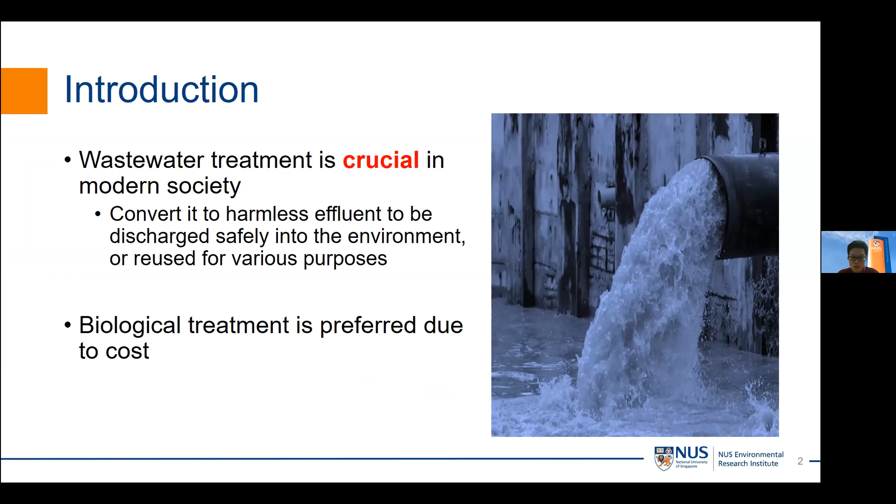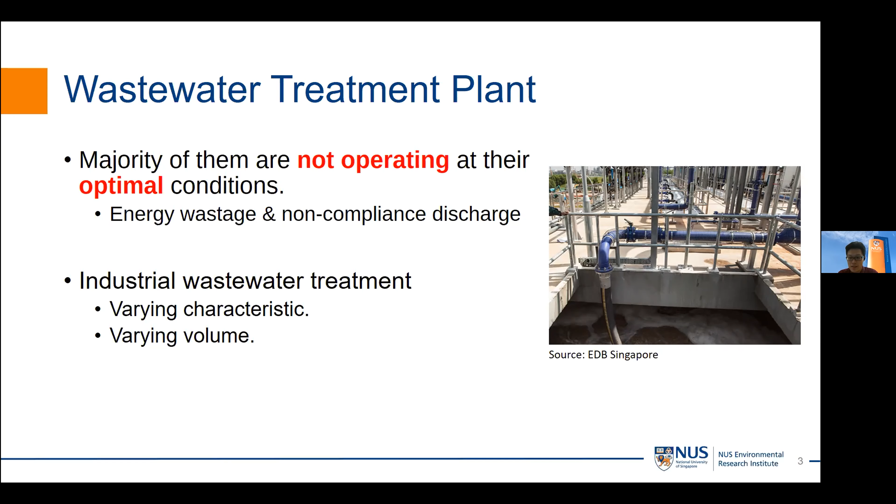In wastewater treatment, biological treatment is often preferred due to its low cost. However, the majority of wastewater biological treatment plants around the world are not operating at their optimal condition, resulting in huge energy wastage and even non-compliance discharge. This is even more pronounced in industrial wastewater treatment, where different processes produce wastewater of varying characteristics. In addition, uncertainties in operating hours often result in varying volume as well.

In wastewater treatment, aeration is one of the biggest energy consumers in the plant. In aerobic treatment, air is supplied to allow the bacteria to break down the contaminants. The aeration process, however, consumes up to 50% of the total plant energy consumption, with up to 30% of the plant's total energy wasted due to poor control. This means that the plant actually supplies more air than is actually required.

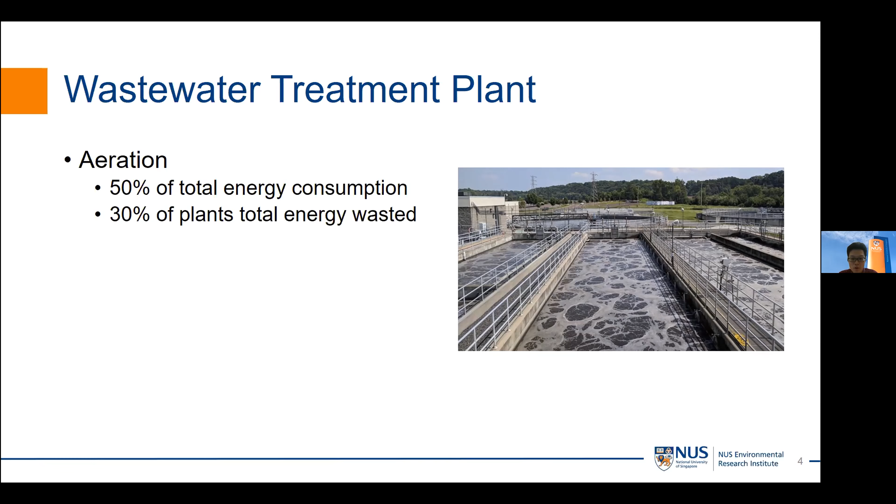Non-compliance discharge is another issue faced by wastewater treatment plants. With increasing environmental awareness, discharge limits around the world are getting more stringent. Non-compliance discharge will result in massive fines and pose risk to public health and the environment. Since 2014, 119 companies have been charged for illegal discharge in Singapore. In fact, we can use modeling to address this issue.

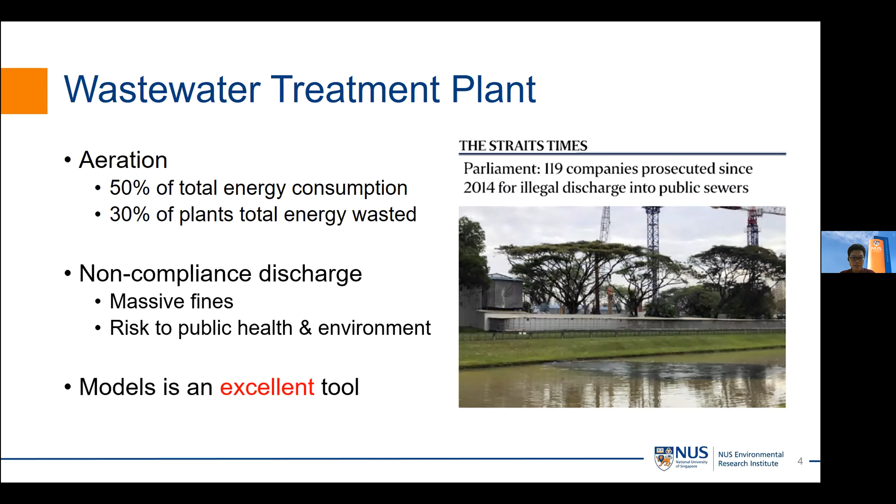In wastewater treatment, modeling is often used to design, optimize, and upgrade existing wastewater treatment plants. It also allows the operator to understand the effects of various parameters on treatment performance, allowing them to predict effluent quality and monitor plant performance. There are two types of models widely used in wastewater treatment systems, namely the mechanistic model and the statistical, or machine learning, model.

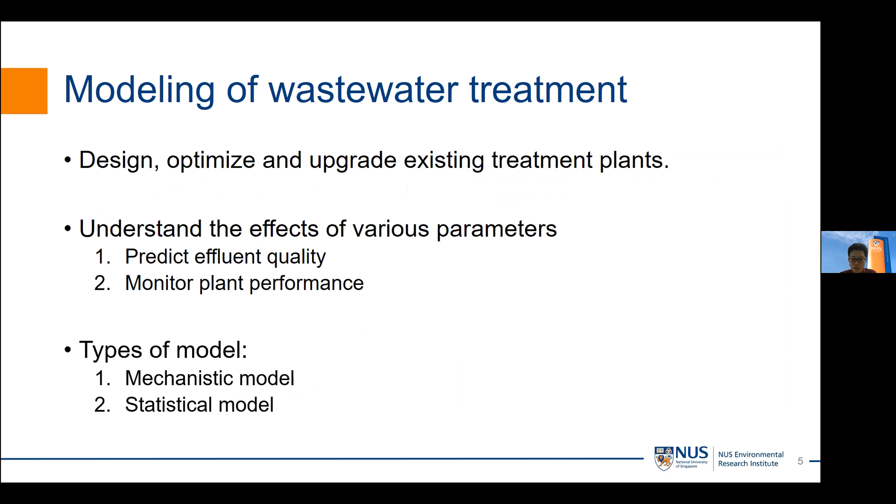Let me go through the mechanistic model first. Mechanistic models are based on fundamental concepts and equations. The physical and biochemical principles constitute the equation. But because of that, calibration is often required as most plants differ from one another. However, in most scenarios, average values are often used, which results in inaccuracy in simulation results.

Examples of wastewater treatment mechanistic models are the anaerobic digestion model as well as the aerobic digestion model, and the activated sludge model.

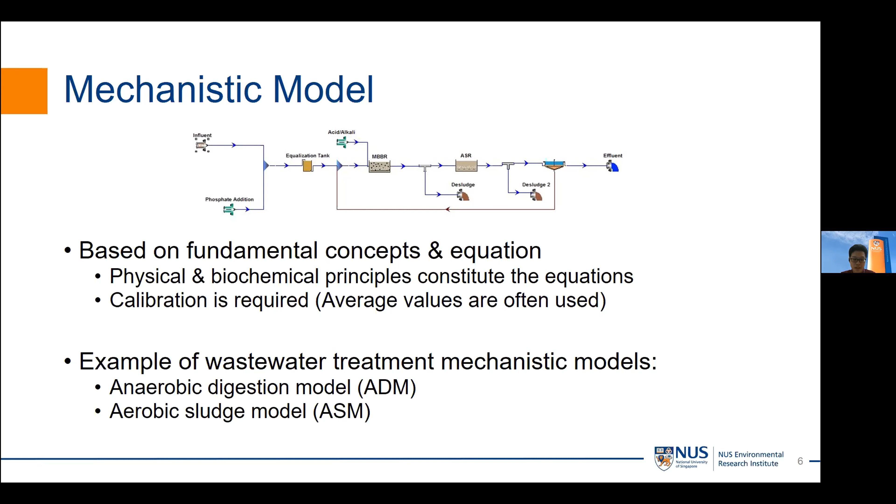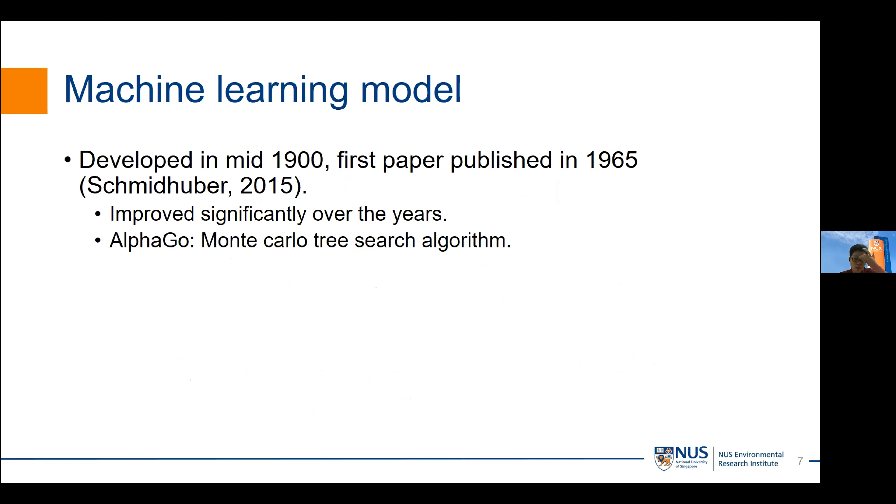Machine learning model is another well-known model. Developed in the mid-1900s, machine learning models have improved significantly over the years through data mining and collection. Most notably, AlphaGo, which uses the Monte Carlo tree search algorithm, is known to be able to defeat the best human Go player. There are numerous studies on the application of machine learning models in wastewater treatment performance, achieving very high accuracy of 0.95. However, its application is highly dependent on the quantity and quality of data.

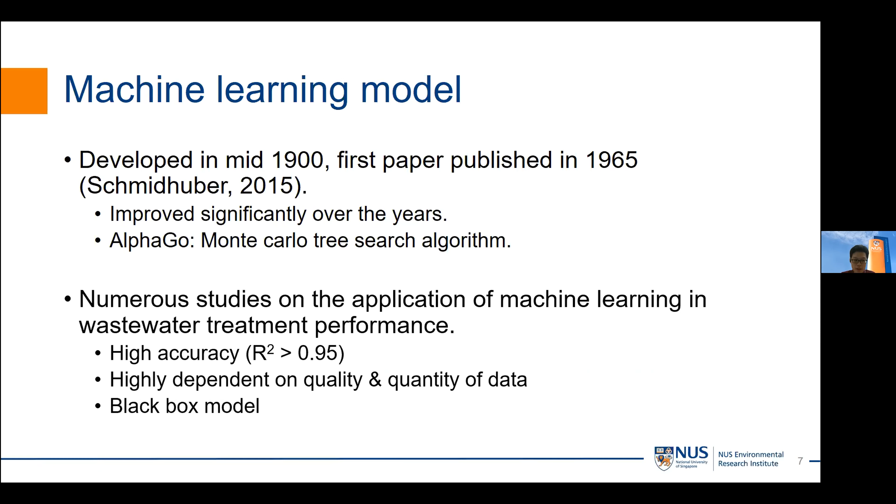And it is also a black box model, so one will not be able to know how the equations correlate with each other.

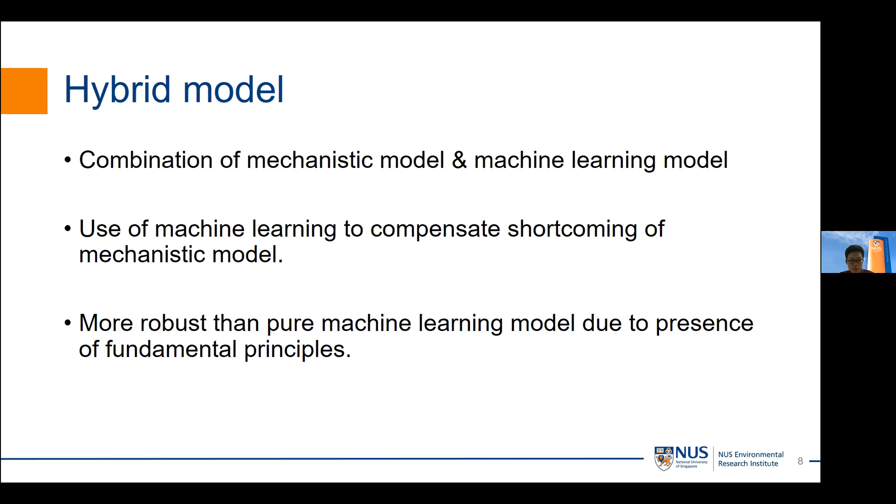This brings us to the hybrid model. Hybrid model is a combination of mechanistic and machine learning model. We can use machine learning model to compensate the shortcoming of mechanistic model, while the hybrid model is also more robust than pure machine learning due to its presence of fundamental principle in the model.

So what do I mean by this? In these two examples, there's a parallel hybrid model and a serial hybrid model. In the parallel hybrid model, the mechanistic model will calculate the treatment performance, while the machine learning model will calibrate the difference between the measured and simulated data, compensating for the inaccuracy of the mechanistic model.

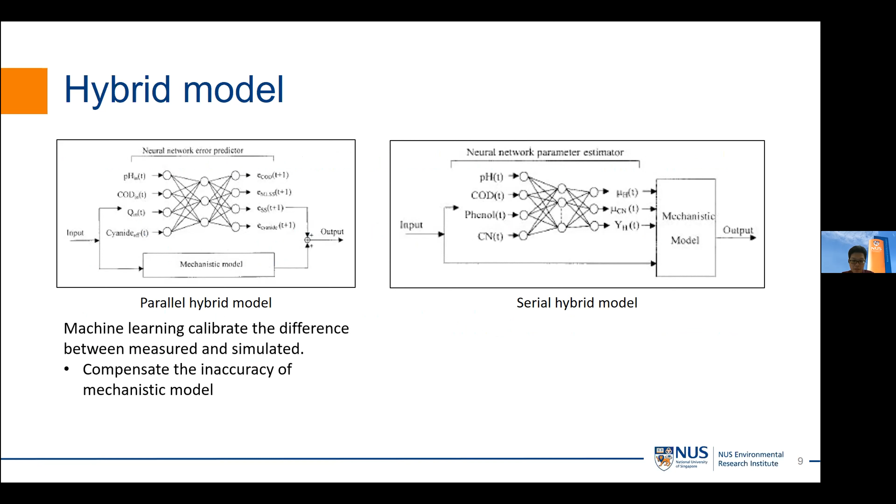In the serial hybrid model, the machine learning model will provide the unknown parameters to the mechanistic model. The mechanistic model then predicts the treatment performance. For example, in this scenario, the serial hybrid model, the machine learning model will predict parameters such as the mu, the maximum substrate uptake rate of cyanide, which will then be fed into the mechanistic model for a more accurate output.

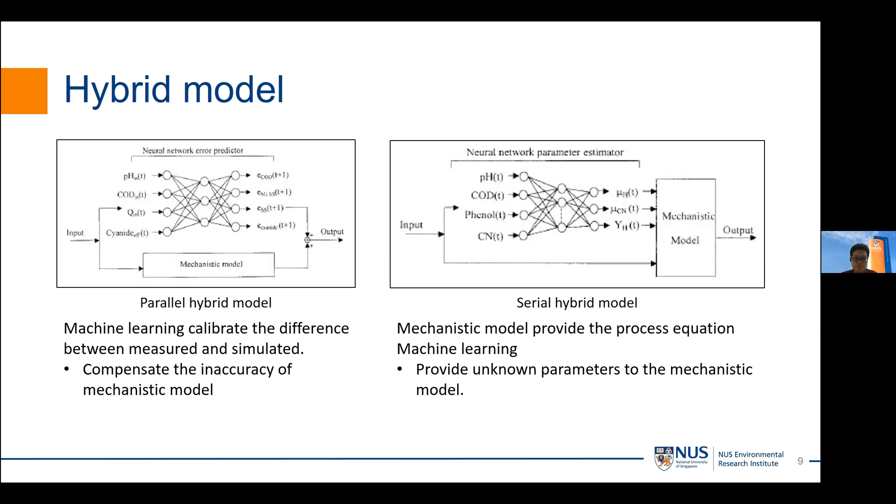In this presentation, we'll be showing our proprietary hybrid model, which is actually a combination of a parallel and serial hybrid model, which further improves the prediction. We have actually done some work using the hybrid model, and we will be showing the result later.

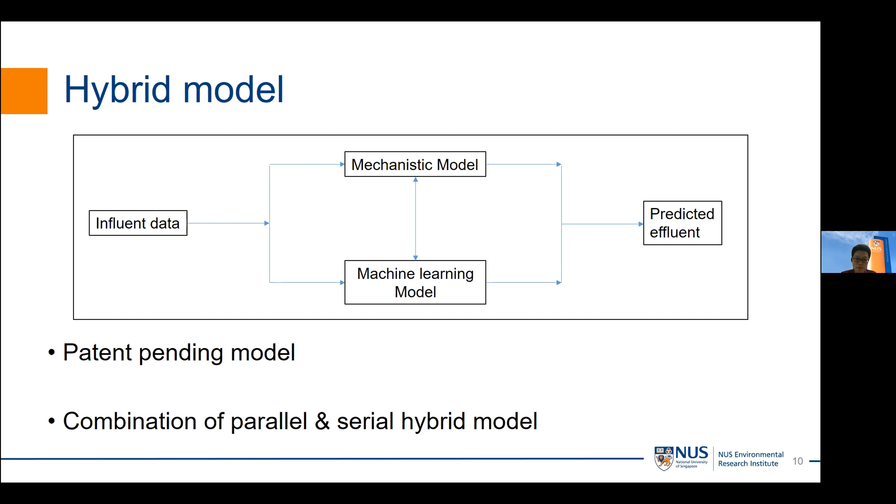As seen in the diagram, the influent data will be fed into both mechanistic and machine learning model. The mechanistic model will also receive information from the machine learning model, while the machine learning model will receive information from the mechanistic model. They will iterate within each other and then come out with the predicted effluent output.

So with more data, we can actually improve the simulation.

The hybrid model was able to outperform the mechanistic model, as the mechanistic model requires careful calibration. For example, in mechanistic model, one will require to fractionate the COD into different components, which takes about a day or two to do it. But every batch of wastewater is different, and hence it is actually not practical, as the wastewater would have actually been treated and discharged before the experimental results are out.

Hence, average values are often used as mentioned previously. The hybrid model, however, does not require such careful calibration, and it is also still able to come out with good result.

We have implemented the model in industrial wastewater treatment system as well. In this experiment, an MBR was set up to treat pharmaceutical wastewater. From the figure, similarly, we can see that the hybrid model outperformed the mechanistic model, reducing the root mean square error and the percentage error.

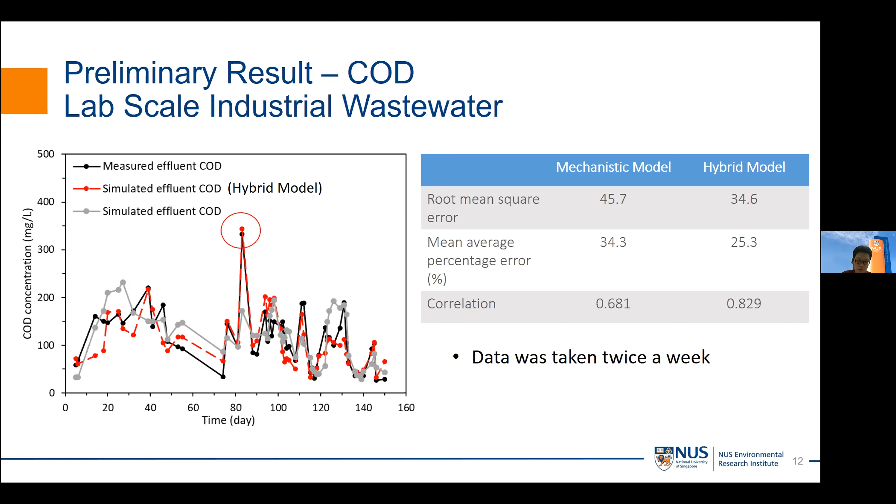While both results are both lab scale, we have also expanded our work into full-scale treatment plant. In this short 2 weeks work, we use our model to simulate the full-scale municipal treatment plant. We are able to achieve very good result with absolute error of less than 5 ppm and percentage error of less than 15%. The correlation was actually more than 0.95, which is actually higher than that of pure machine learning.

However, one may argue that domestic wastewater treatment in full scale is actually very stable and hence much more stable than industrial wastewater, and hence the simulation is much better than the lab scale.

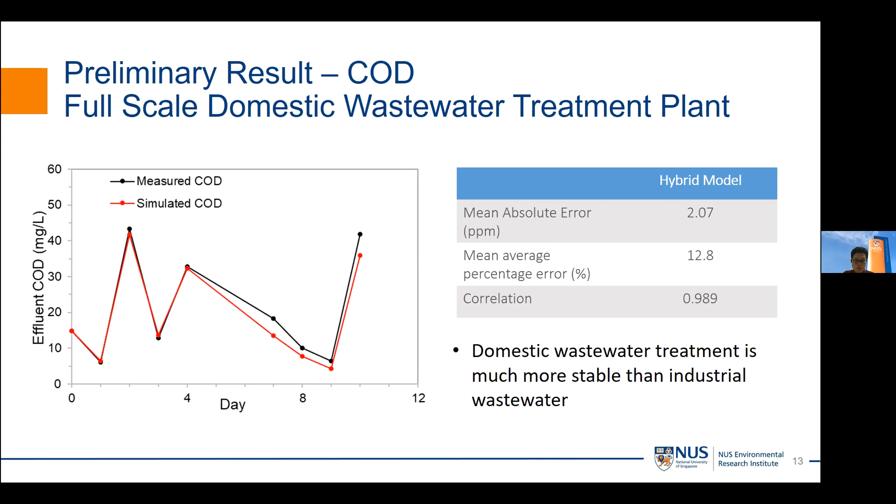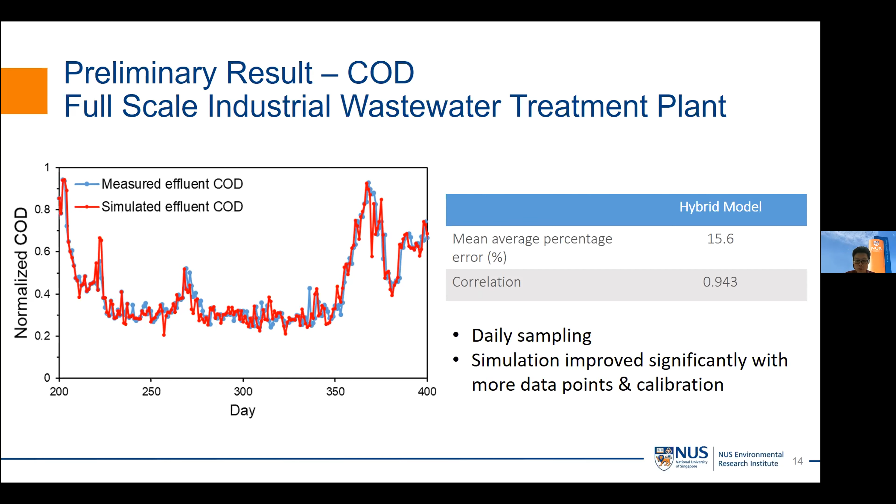The results from the full-scale reactor are actually better than the lab scale study, primarily due to the fact that the plant does daily sampling, which provided us with much more data samples, and we were able to train and calibrate our model better. This shows that the simulation improves significantly with more data points and better calibration, showing the importance of daily sampling.

The model can also simulate solids concentration. In this diagram, one can see that the model is able to simulate the mixed liquor concentration of domestic wastewater treatment with great accuracy. The simulation followed the trend well, and the percentage error is less than 10%. However, as we do not know the plant operation and how they collect the sample, this might explain why some of the data deviates from the simulation. But nonetheless, we can see that the trend of both the measured and simulated is going towards the same direction. In addition, we do not have data on the plant

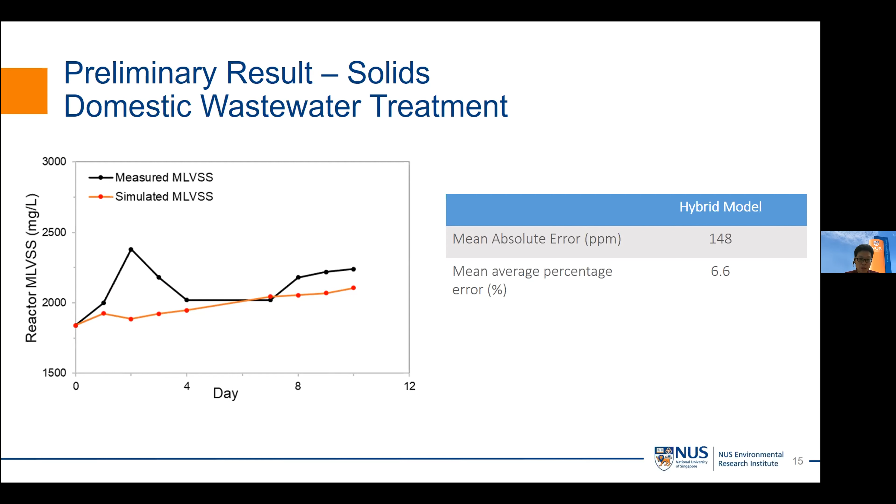biomass disposal. According to the operator, they dispose their biomass through MLSS measurement. So once they measure the MLSS, they will try to keep it within range. From this, we can use our model, as our model will be able to predict the biomass growth, and we'll be able to know if the biomass will be within range prior to the measurement.

We also use our model to predict solids concentration in industrial wastewater treatment. The result is not as good as the domestic counterpart, similarly due to the fact that we lack the biomass information and we do not have the discharge information, the solids retention time, etc. Nonetheless, it is still a good indication to allow the engineer to know how much biomass growth there will be per day, and the engineer can make informed decisions on how much biomass to be disposed daily.

This might not be an issue for tropical countries like Singapore, but for countries with 4 seasons, it is actually very important that the biomass within the system is kept within range. This is because when temperature drops, processes such as nitrification and bio-P removal will be affected greatly.

And hence, during winter time, they will try to retain as much biomass as possible. With our simulation, with our model, we'll be able to give them more information on how the biomass is able to affect the process, how much biomass to be retained within the system such that their processes such as nitrification and bio-P removal will not be affected adversely. So the solid concentration will be important to ensure that the processes will work as per norm and will be able to meet the discharge limit.

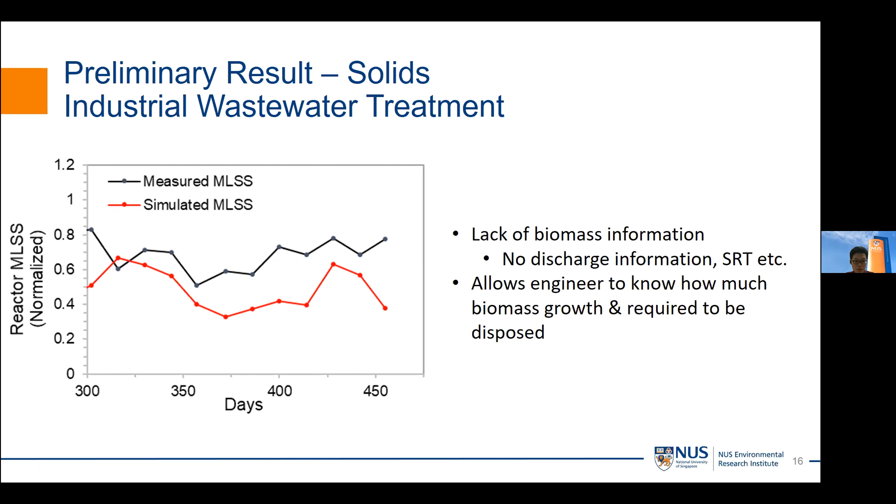Due to its accuracy, the hybrid model can also serve as fault detection. From the graph, you can see that the simulated value follows closely to the measured value all the way to day 103. On day 103, the measured value differed greatly from the simulated value. This means two things: either the equipment involved in the nitrification process is damaged, or the simulation is off. Our team began to check the system and found out that the pH control is actually damaged. Nitrification process requires careful pH control, and with the pH control damaged, it will cause the nitrification

process to be affected and hence the simulation to be off. From day 103 onwards, manual pH control was done, and the pH control was replaced on day 135. After that, the measured value is again very closely correlated to the simulated value. This proves that the model can actually be used as a fault detection as well.

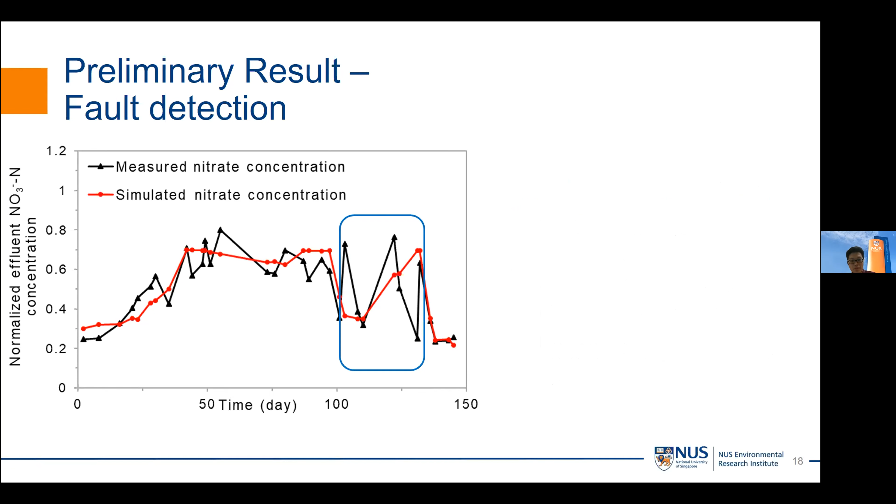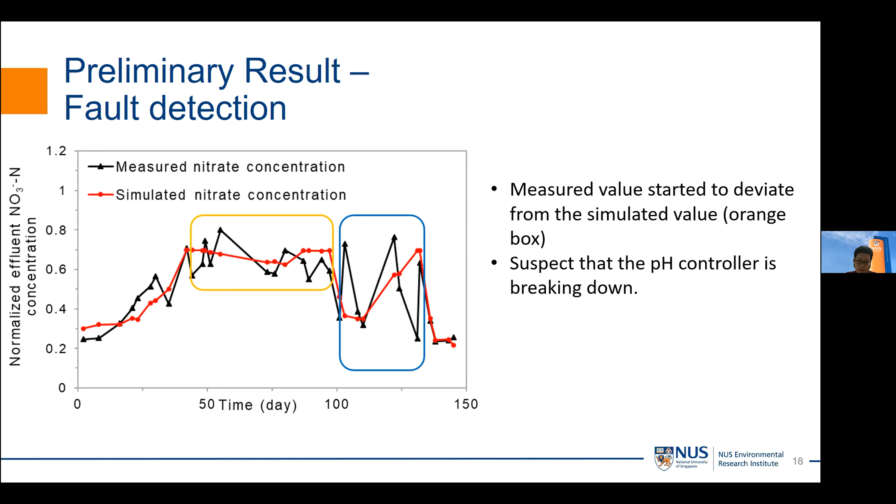Prior to this, upon closer inspection, one can observe that before the breakdown of the pH control, the measured value starts to deviate from the simulated value, as seen in the orange box. So from the orange box, we can see that the measured nitrate actually fluctuates around the simulated value. This gives us a potential indication that we can suspect the pH controller is breaking down, since it actually starts to break down since day 50 of operation. Do take note that this is industrial wastewater treatment, and in industrial wastewater treatment, the incoming pH changes greatly, which then affects the nitrification process.

In the introduction, I mentioned how models can be used for aeration control. Our hybrid model is able to calculate the oxygen demand, which changes with time. This information will be very useful for the operator, as they can adjust the aerator to meet the necessary oxygen demand, reducing instances of over-aerating and energy wastage.

With that, we estimated that implementation of the hybrid model will result in an estimated saving of approximately 20% for municipal wastewater treatment, and it may be higher for industrial wastewater treatment.

So how can one correlate the aerator to the oxygen requirement? There are fundamental calculation processes that correlate the aerator to the oxygen demand. With that, we can back-calculate using the information of the required oxygen, and then calculate the blower capacity needed to meet the oxygen demand.

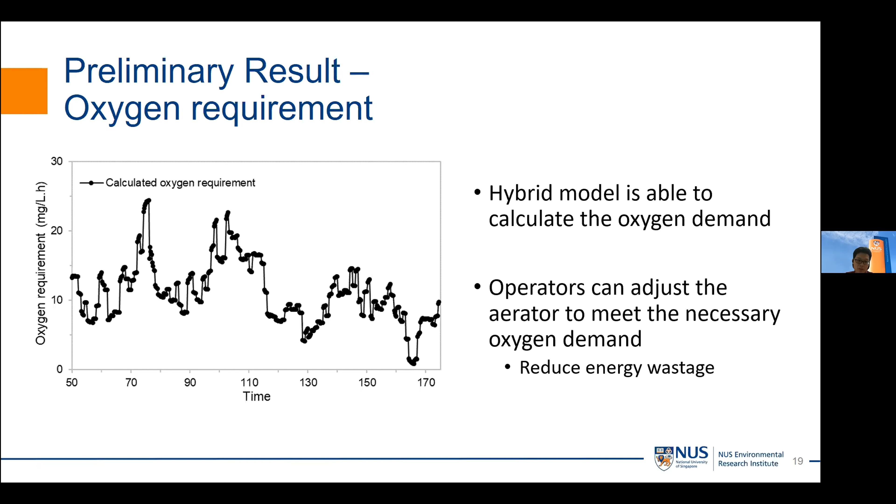With that, we have come out with a patent-pending hybrid model that is able to give us highly accurate simulation, which allows us to have predictive control and a recommendation system.

We can also calculate the biomass growth so that the operator will be able to maintain the biomass concentration. The hybrid model is also able to come out with fault detection, and predictive fault control can allow the operator to maintain the equipment instead of repairing them. This reduces the OpEx cost.

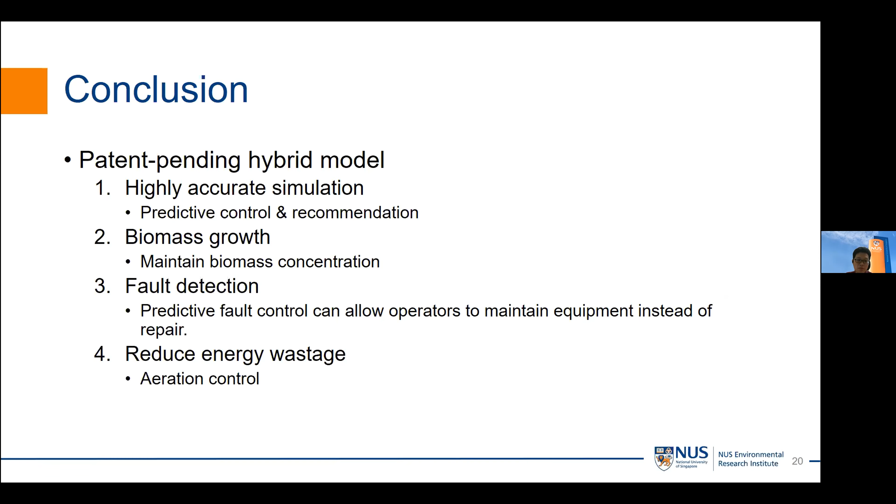Lastly, the hybrid model is also potentially able to be used for energy wastage reduction through careful aeration control.